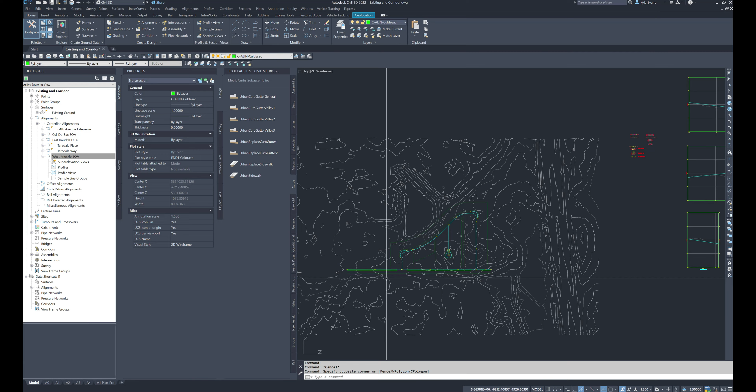So we're going to do one main corridor for the road center lines, our typical driving lanes, which includes our knuckles and our cul-de-sacs. And then we will do three separate corridors for our intersections, just to keep things a little bit separate and keep our heads on straight and try and not wind up confused.

So I am going to go corridor, create corridor. We can finally make one. I'm going to call this our Seaside subdivision corridor. I had to think of a name there.

Corridor style will be default, it's going to make a layer. I want it based on an alignment and a profile. Now we're going to be adding baselines and doing a lot of other work to this, so the pure old default one, I want 64th Avenue extension.

And this is where we now start seeing the power of naming things. When I select my alignment, we only have the 3 so far, because the other 3 don't show up—our knuckles and cul-de-sacs—because we haven't defined a profile for them. So we have our 64th Avenue extension, our Seaside Place, and our Seaside Way, but I'm going to start off with 64th Avenue extension, and then I'm going to choose my 64th Avenue extension design so it follows that design line.

My assembly, and we got a few of them. I am going to go and have to delete some of these here in a minute. So I want primary collector median, and then I'll go delete my other ones as soon as we make the corridor.

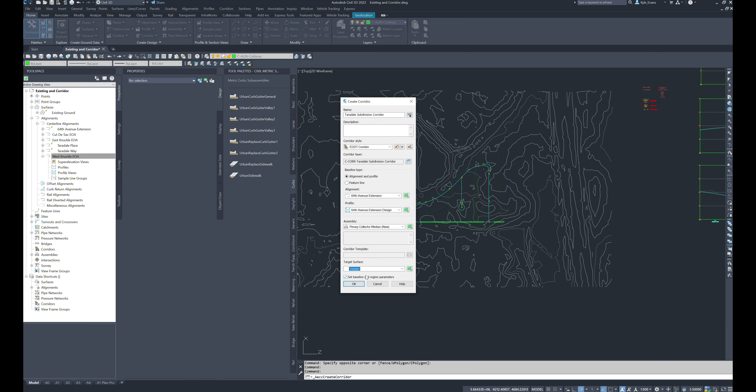Corridor template, I'm not going to bother with that. And target surface, we haven't set up any targets because at the end of the day, I'm going to grade off lots from my subdivision here, so I'm going to leave that set for none. I'm going to turn off the set baseline and region parameters. I just wanted to build the corridor, and I'm going to click OK.

We'll give Civil 3D a minute to build it, and I'm going to save the drawing. And then delete all these additional assemblies on the left-hand side here that I had left over from a previous drawing. All right, those are deleted.

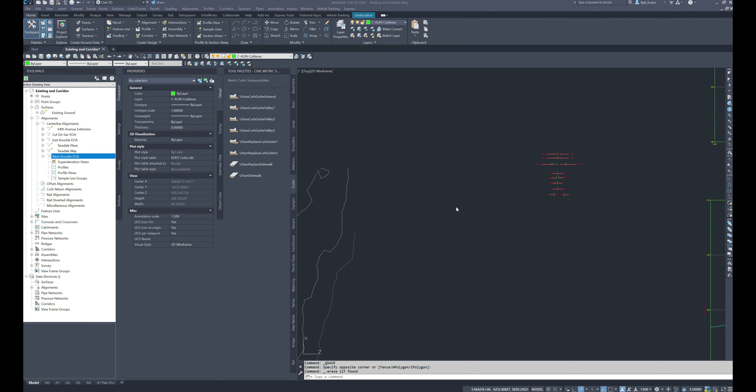I'm going to come and take a look at my corridor. Now, it's just a long straight corridor for my 64th Avenue. It's following the 64th Avenue extension. We can't see any surfaces yet because we haven't got them turned on.

Now, there's a couple different ways of completing this next step, and I'm going to show you both. So I want to start breaking this corridor apart, specifically near my 2 intersections. We can select the corridor, right click, and go modify region, split region. Civil 3D will ask us to select a region to split, so I want to split this whole piece, and it asks me where I want to split it. I'm going to click roughly near that first intersection.

I'm going to give Civil 3D a minute to rebuild that, and as we see, a couple of grips showed up. This grip allows me to move the split. These two triangular grips will allow me to make that split larger, though it'll be a little slow and laggy since we're modifying a corridor.

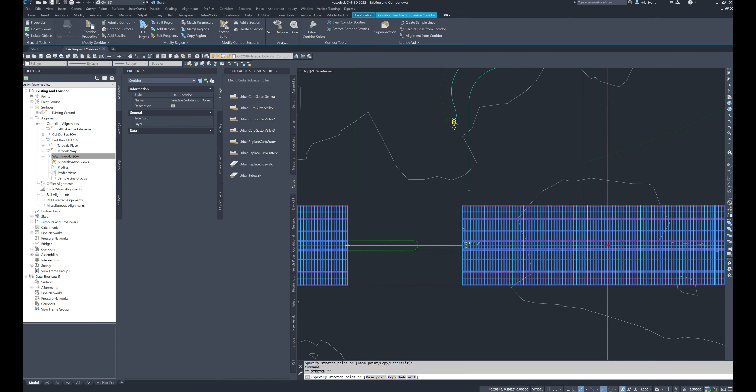I'll end up coming back and changing these at a later date to match up our roads properly. So select the corridor, right click, split region. We can also select the corridor, right click, corridor properties, and modify it with our station pickers.

So my first section here is from 0 to 154. My second section goes from 242 to 519. However, I want to click this little candy cane looking button, and stop it roughly around 430, 428. Then I want to right click, insert region after. Civil 3D is going to pop up.

It's going to ask me what assembly I want to use: primary, collector, or median. Then I want to split it along that right hand side as well. So I have my initial section, my middle section, and my right section.

Now if we hit apply and rebuild, it'll rebuild the corridor in the background. Keep in mind, the higher your frequency, the longer this is going to take to build. If you have a slower computer, having a frequency of 1 meter might not necessarily be the best idea because it's going to be extremely slow.

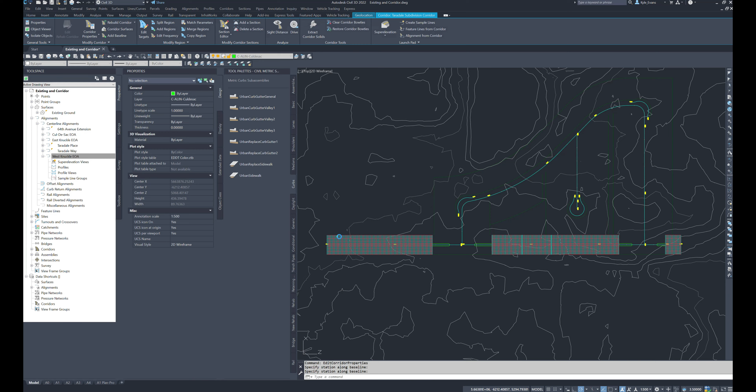So far we've added our primary collector and split it at our two intersections. I'm going to do the same thing in corridor properties with my residential road, so I have all the main sections of my road in the same corridor. To do that, again, back into corridor properties, right click corridor properties.

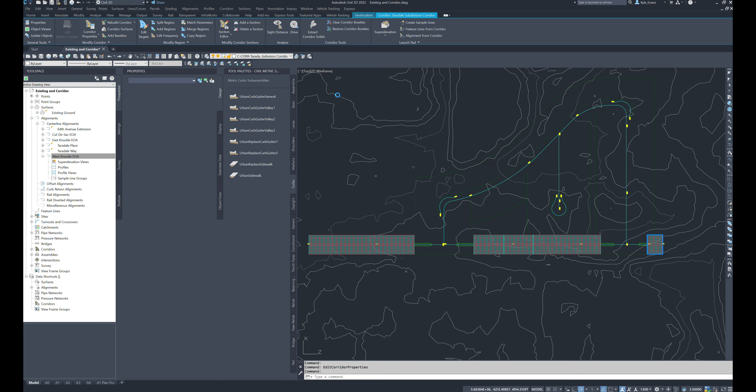Under the parameters tab, I want to add a baseline. My baseline is going to be residential road, and my alignment will be Seaside Way. I'm going to set up my vertical baseline to Seaside Way design.

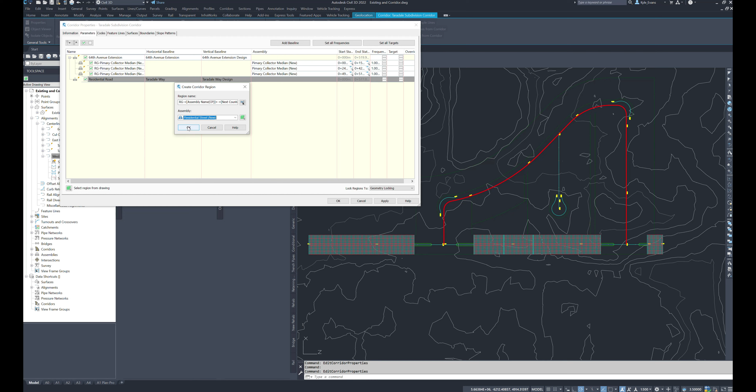Then I'm going to right click and add a region on my residential road. I'm going to select residential street and hit OK. If I apply and rebuild, it is going to include this part in this corridor.

Now I'm going to start off by giving a little bit of a break, and I'll do that again. So my residential street, I want it to start about station 23, and I want the end station to be about station 547. Let's see if I can make these a little bigger so we can see things.

However, when we're coming into building corridor pieces, especially if we have knuckles, we actually need to define the end stations and start stations a little better. So this start station I'm going to leave as is, because I don't know where my intersection is going to build yet.

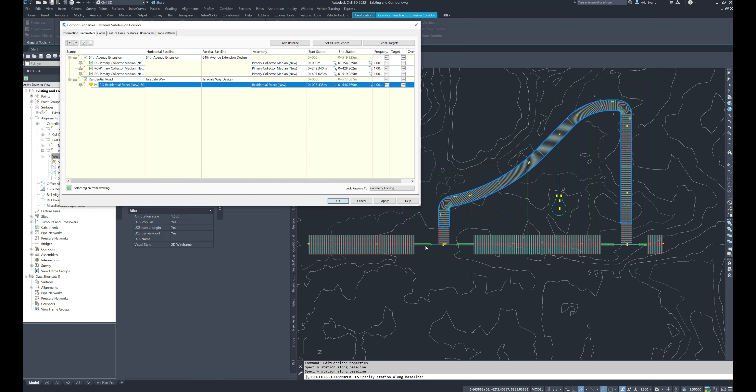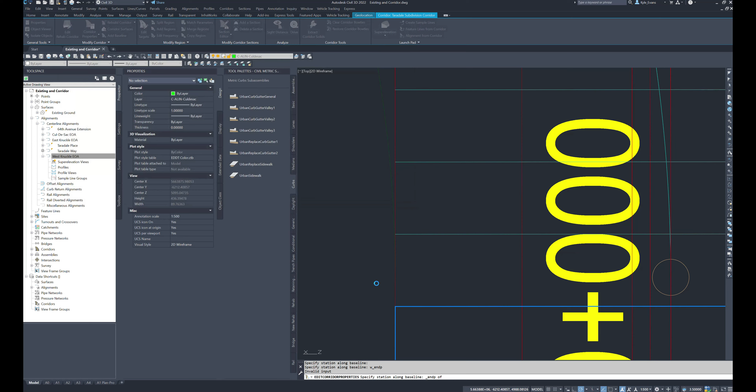My end station, however, I'm going to start preparing for the knuckle itself. My end station of my regular road cross section is going to be the end point at the south end of my knuckle. So if I just hit OK and rebuild, we can pop into model space and check. If I select this, or even this one here, my road end station, the regular road cross section, is going to end where that knuckle begins.

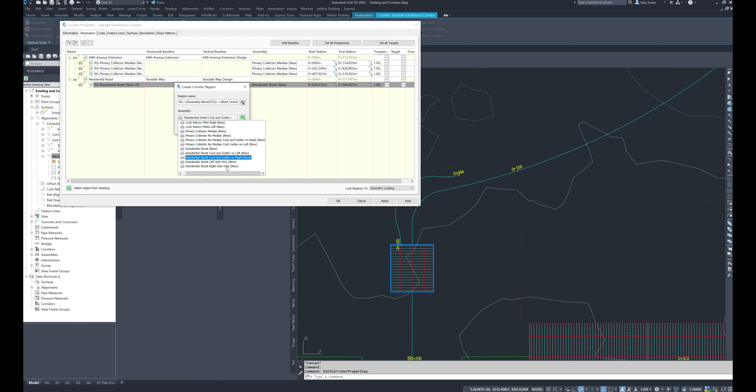So right here, I'm going to go back into corridor properties and insert region after. I want residential street, curb, and gutter on right side only, because when we build it through the knuckle, the start station will be here and the end station will be right here. Now if I hit OK and rebuild, we'll see what's happening.

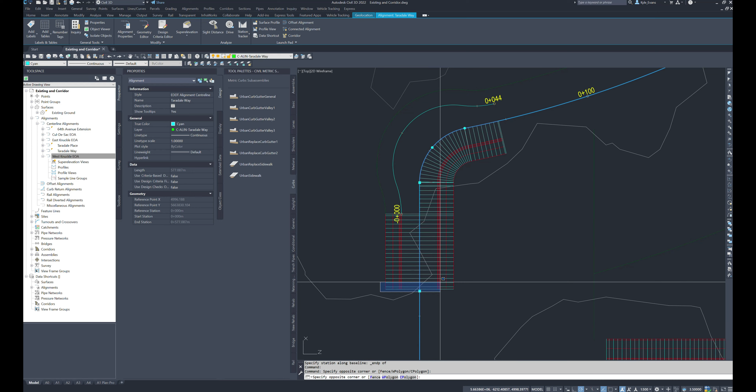So I've defined, here's my road center line. I have a regular road cross section to the start of my knuckle. I have my right side only through the knuckle. And then I'm going to do my regular cross section past the knuckle.

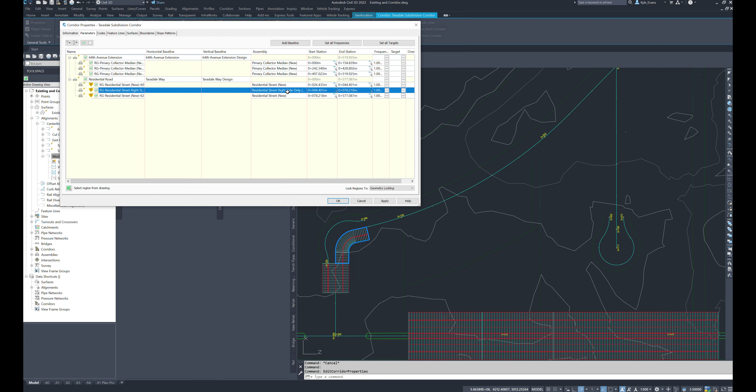So back into corridor properties, right click, insert region after. I want the residential street, and the end station is going to be roughly about 225.

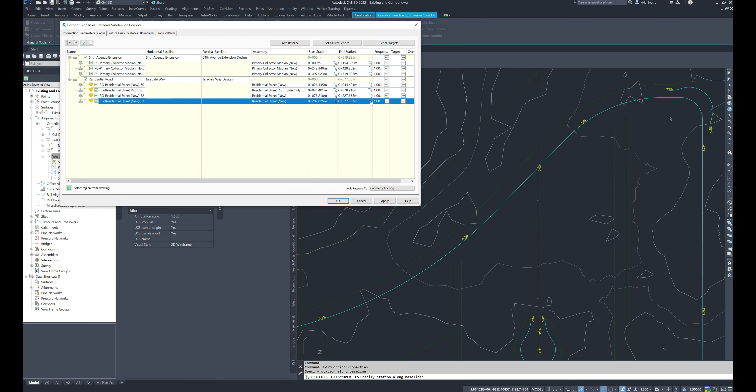I'm going to insert a region after because we have an intersection here. I want residential street. My start station for that will be roughly 300, and my end station for the normal road cross section is going to be at the start of this knuckle. Let's hit OK and rebuild to see what it looks like.

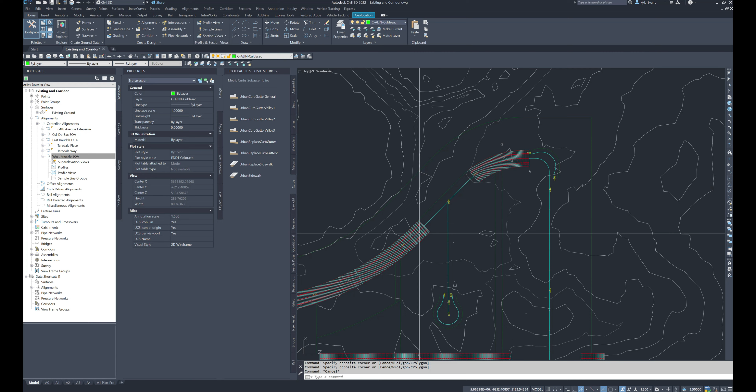So we have regular cross section, we have right side only, we have regular cross section, we have an intersection opening, and we have our regular cross section.

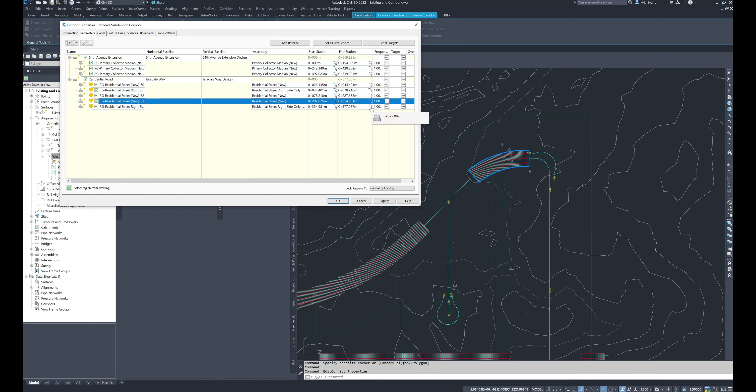Back to corridor properties to define this knuckle. Right click, insert region after, residential street, right side only. Start station will be right here, and end station will be at the end of this knuckle.

And then lastly, to wrap this up, insert region after. We want residential street, and we want the end station to be roughly, for now, 540, give or take. So we'll hit OK and rebuild.

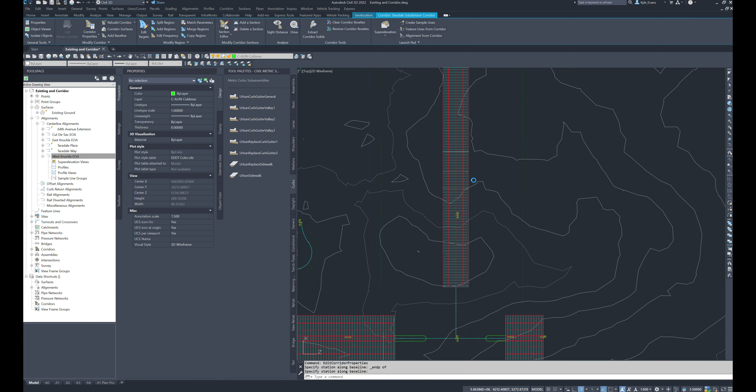Once Civil 3D has rebuilt our corridor, this is all again in the same corridor. We have our primary collector with splits for the intersections, our residential road with a split for the intersection, and we're utilizing the right side only pieces around the knuckles.

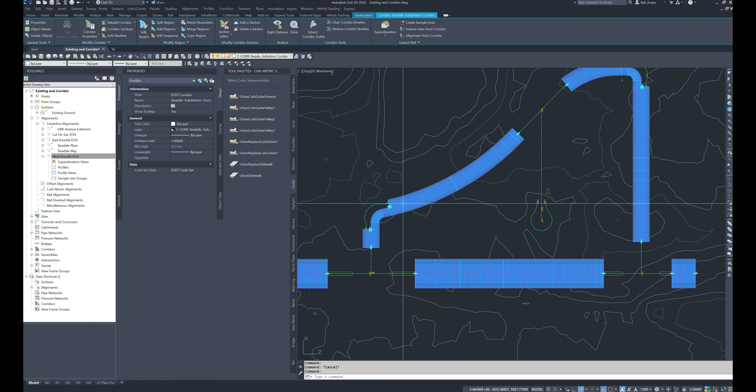Now let's go ahead and make a surface out of this and start taking a look at the surface itself. I'm going to select my corridor, right click, and go to corridor properties. I'm going to go under the surfaces tab.

I'm going to create a new surface volume entry and name it Taradale Subdivision Top. I'll leave it on the 0.5 and 0.1 style, and then lastly we have to remember to add a top code or specify our code, since I just wanted to model the entire top.

We can create a new surface for Taradale Subdivision, and we'll call it Taradale Subbase, Taradale Subdivision Subbase, and then I'll add the subbase code to that as well, so we could figure out volumes of materials for our road itself.

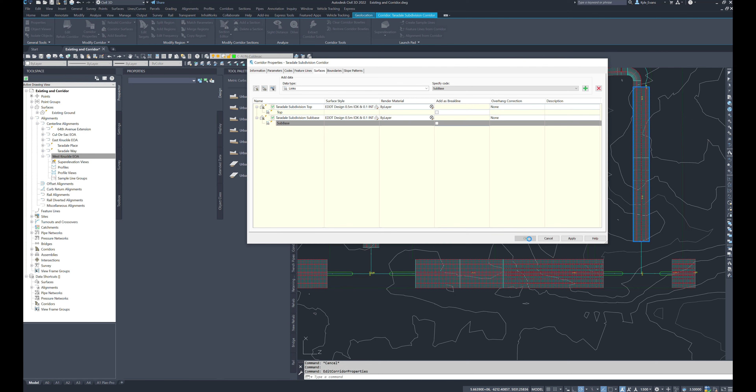Now if we hit OK, our surfaces should show up. I'm going to have two of them because I have one for my subbase, and I'll just quickly freeze that right now. And we have one for our road top.

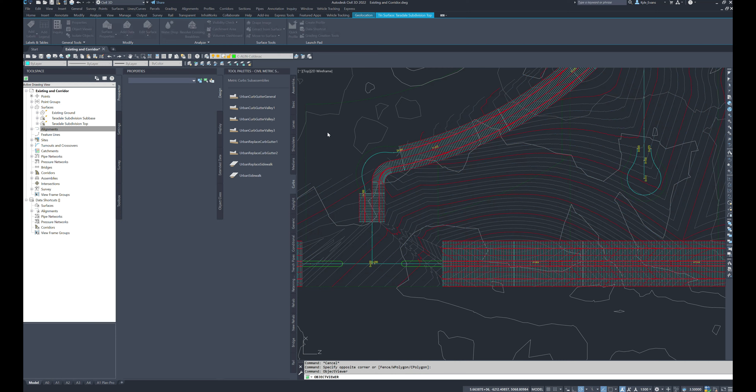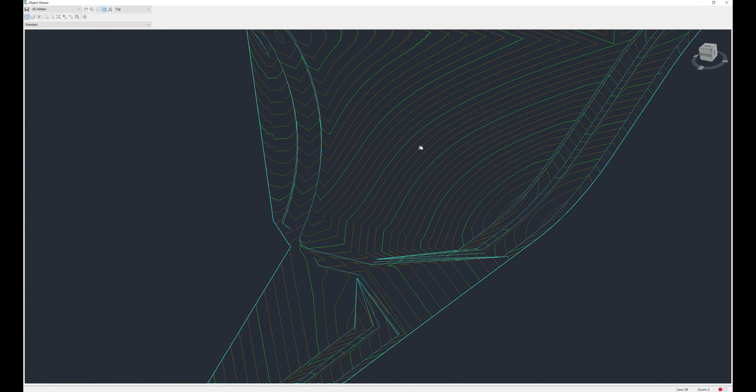Now, if we take a look at this in Object Viewer, it's not going to look very pretty yet because we haven't included all our other pieces. Keep in mind, this is 10 times exaggerated. So we can see here where our initial primary collector is, the intersection, the middle of our primary collector, intersection, the end of the primary collector, and then the internal residential road pieces where we have it defined.

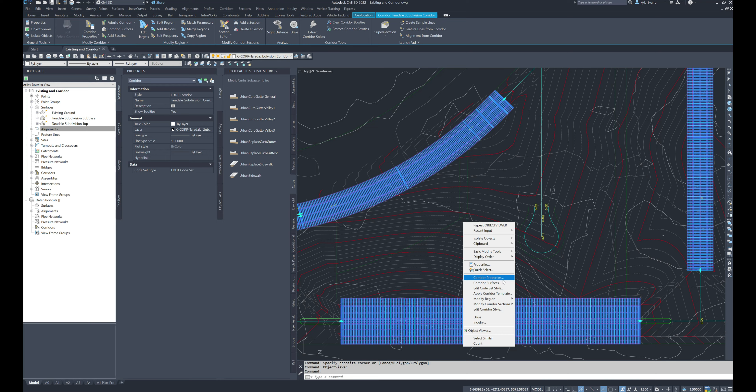Lastly, let's add the road going down into our cul-de-sac. I'm going to select my corridor, right-click corridor properties. Under the parameters tab, I'm going to add another baseline.

I'm going to call it the cul-de-sac road. It's going to take my Taradale Place. I'm going to select a vertical baseline of Taradale Place design. Hit OK. Then right-click, add a region. It will be using residential street. I'll hit OK.

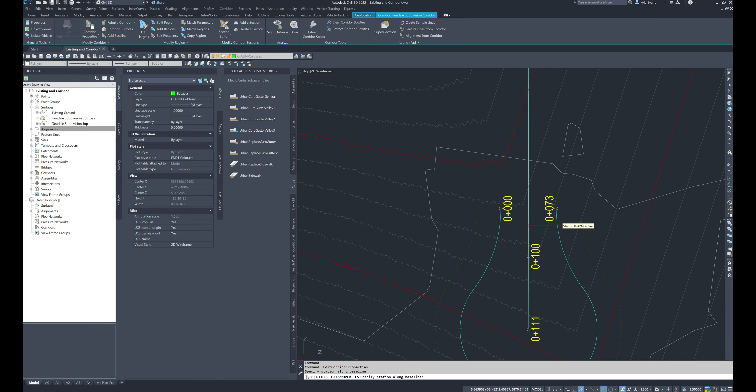And then I'm going to modify the start station and end station. The start station will be roughly, we'll make it start about 40. Again, we're going to have to modify all these afterwards. And my end station will be at the end of this cul-de-sac alignment.

Okay, that didn't work. We can try it again. And it completely disappeared. Okay, we're going to cancel that and try it again.

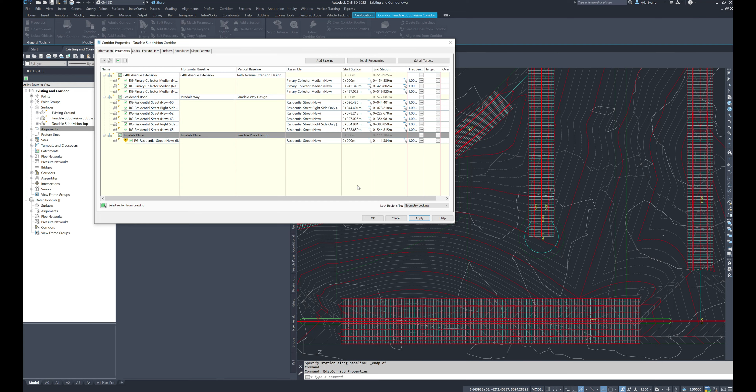Add a baseline, Taradale Place. I've never seen that bug happen before, where it removes stuff from this corridor properties window. So before we go modifying the start and end station, we'll just hit apply and rebuild to build it now. Okay, it seems to work now.

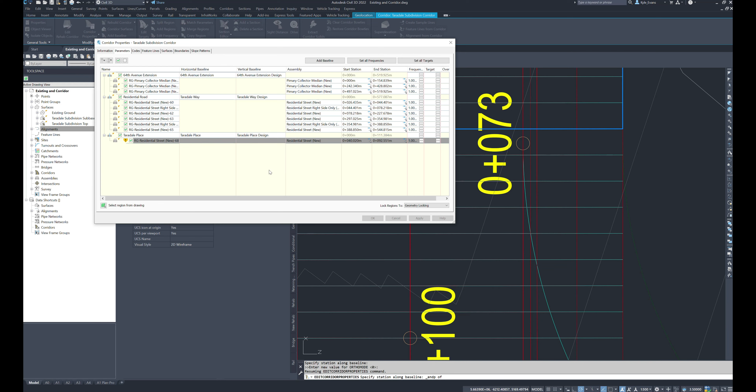I'm going to do the start station around 40 again. Apply and rebuild. Then we'll try setting the end station up, and this is where it all messed up last time. It doesn't look like it did that now. Apply and rebuild, and we'll have Civil 3D rebuild that.

So I'm going to go ahead and save my drawing. In the next video, we are going to take a look at our knuckles and our cul-de-sac, so we're going to have to define profiles and pull elevations for those. Then in the video after that, we will concentrate on our intersections.